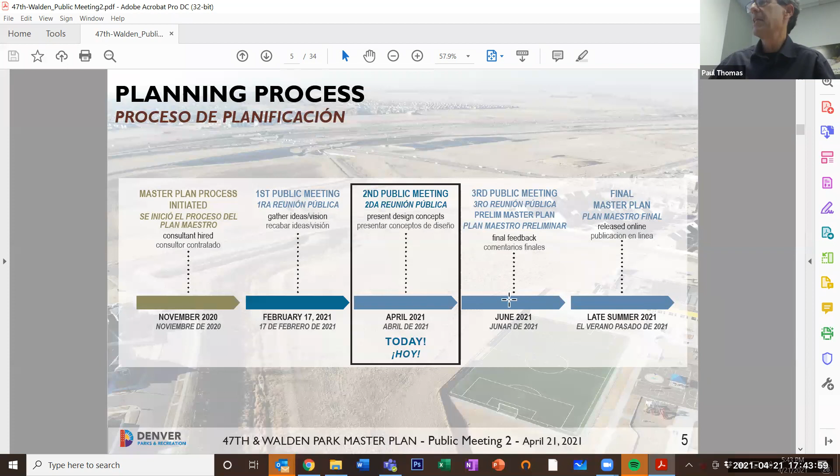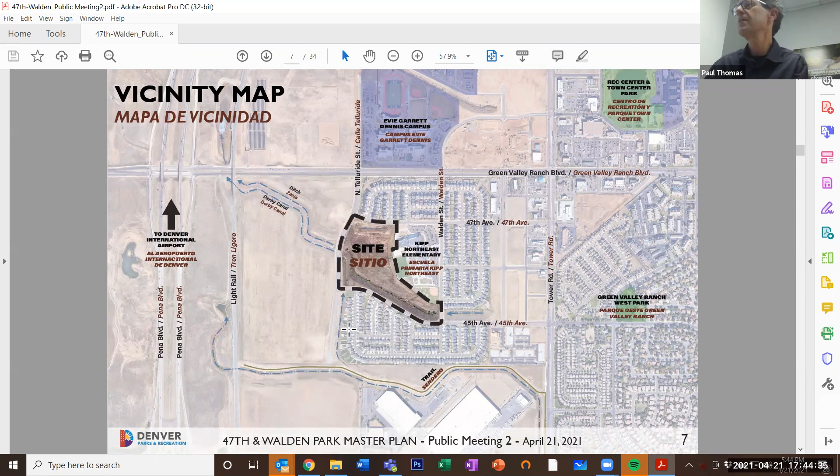So going first to the recap of the first meeting, and I'm going to go through these fairly quickly. The site is in the Gateway area near Green Valley Ranch. You can see the site here in the middle. It's in a neighborhood of existing houses, but it's also bordered by a lot of future development parcels, as you can see from this aerial. It has a historic ditch that crosses the southwest corner, and it also has a drainage way going through the middle of it.

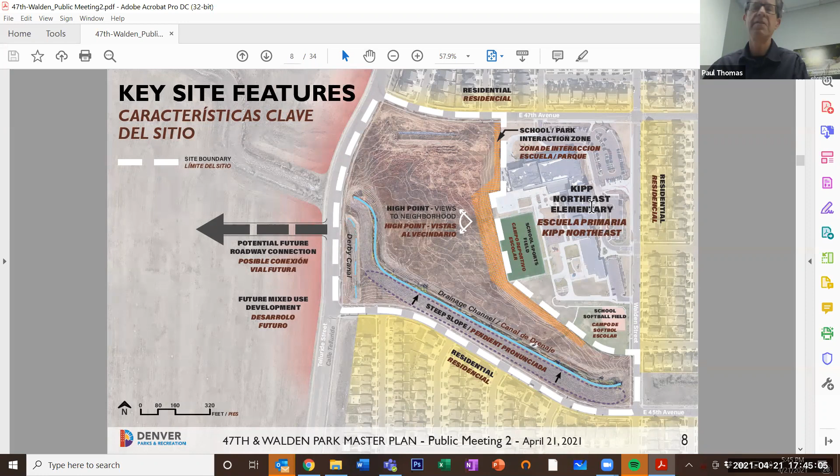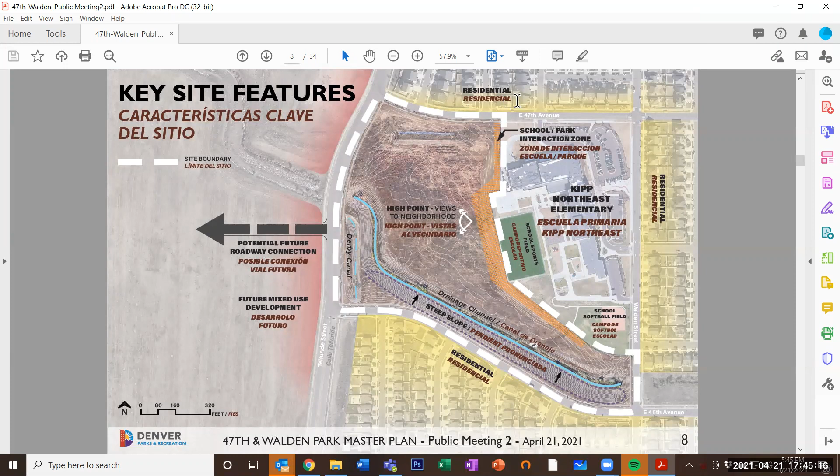This is a slide that shows some of the key features. The blue line there is the drainage way, and then this little also blue line on the corner is the old Derby Canal, which was part of the Highline Canal network that delivered water to the Rocky Mountain Arsenal area. You'll also see that we share this block with the KIPP Northeast School, which is both an elementary school and a middle school. And then you can see the neighborhoods to the north and to the south.

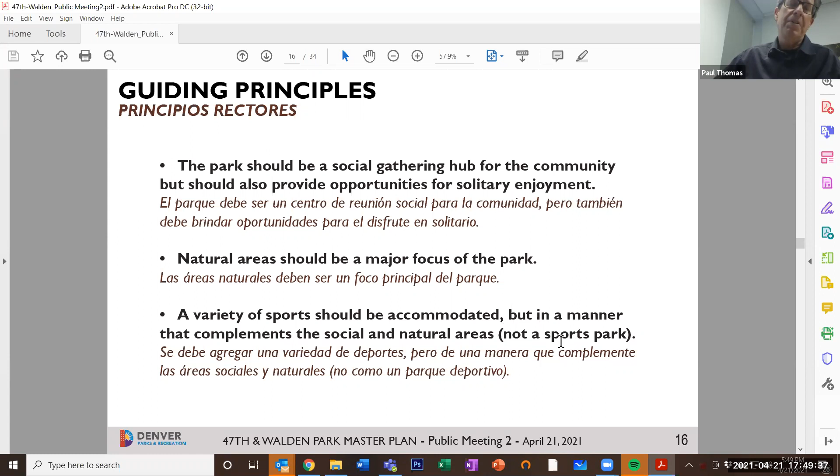We should connect the park to the community on all sides and create strong pedestrian connections to adjacent neighborhoods. The park should have a strong connection to the Derby Lateral Trail, a regional trail planned along that corridor, as shown in the initial slide. There's good reason for this connection, as it will link within and between neighborhoods in the local area.

The park should provide opportunities for joint use by the KIPP school for students and teachers both. We thought the drainage channel should be enhanced as a natural feature and environmental learning opportunity. The park should be sustainable and designed to conserve natural resources, and should be a safe place in all meanings of that statement.

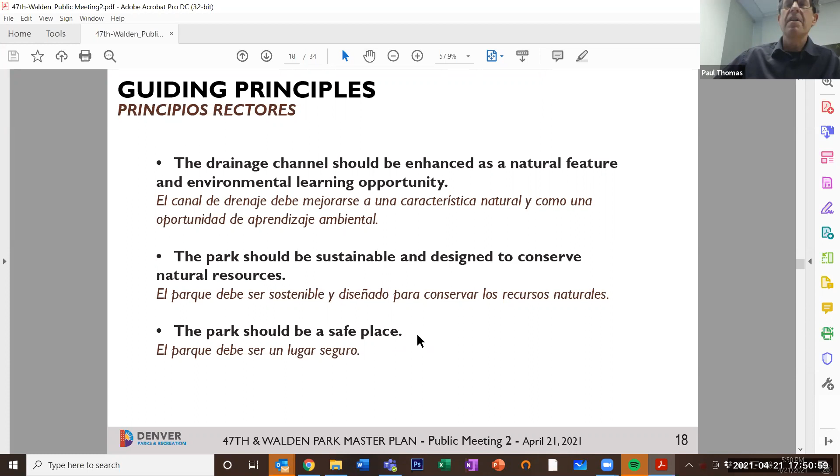The park should attract and provide recreational opportunities for all ages and cultures. The activities should complement the recreational offerings already in the far northeast area and nearby parks. The park should be flexible, able to accommodate a wide variety of functions and events such as concerts, picnics, and celebrations. It should encourage healthy living and feature a variety of landscape types, from manicured grass and natural areas to gardens, shrub beds, and tree groves. That wraps up the guiding principles.

And we're going to move into the concept plans. I'm going to turn over the presentation to my colleague.

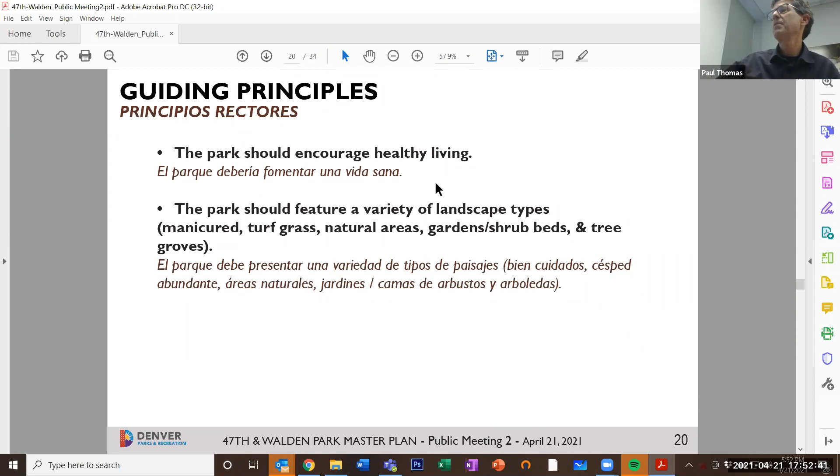Actually, before that, can you go back to the guiding principles? I wanted to make sure if anybody saw something that stood out to them, resonated with them, or if they feel something is missing—please put that in the chat. We haven't started using the chat yet, but we want to hear from you. If there was something you heard that you loved, let us know, tell us what you like especially, we love encouragement. So, are we going to move to a different file?

Yes, let me share my screen. Is everyone seeing my screen? I'm not seeing it yet. We just see your desktop, you might be sharing the wrong thing. Try that again. I stopped sharing, are we good now? Yes, thumbs up, great.

Great, thank you all for coming, and thank you, Paul, for the synopsis of our last meeting and the general overview of the project. We're really excited to be working on this park plan, a 13-acre park in this growing neighborhood.

Have it on full screen, Laura. I'm not able to turn the— oh, there it goes. Okay, just takes a moment, I guess.

So we've developed 3 concepts to share with you today. What emerged from our first public meeting were some themes: a lot of interest in a sports theme, one that's a bit more passive recreation focused on nature and open space, and a third focused on activity and a social community hub. We've prepared these 3 concepts focused on these themes. However, it's really important to keep an open mind.

Wherever the design lands will, no matter what, probably be a combination of these themes. This is just a way for us to organize and present it to you with these key focus areas. But when we send out the survey and solicit your feedback, even in this forum in the chat, we really want your feedback on specific amenities and design features that you really like, or that you think are missing, or you don't like in a particular location. That's the specific feedback we're shooting for.

So we welcome your feedback, and we'll get to that in a little bit. For right now, I'll just run through these. Feel free to write your questions in the chat, and we can open it up at the end. So this first one is the sports concept.

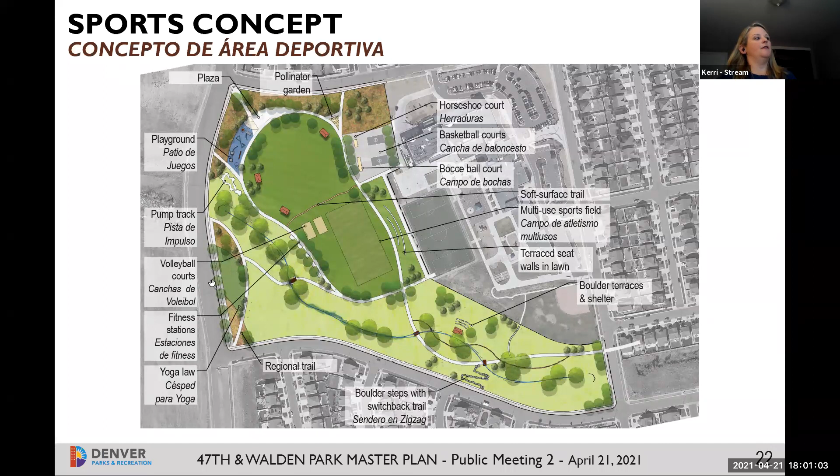So that is the sports scheme. I just wanted to expand upon it with some imagery. Sand volleyball and turf are over here, and we have soccer shown - soccer is a very high demand sport, and this field would support that use. We're showing some boulder terraces for how that might work into the hillside, since there's grade change as the site moves from east to west, with the grade going down toward the drainage area. We could take advantage of that grade with terrace seating, and the bottom image reflects more formal stadium-like seating in this area.

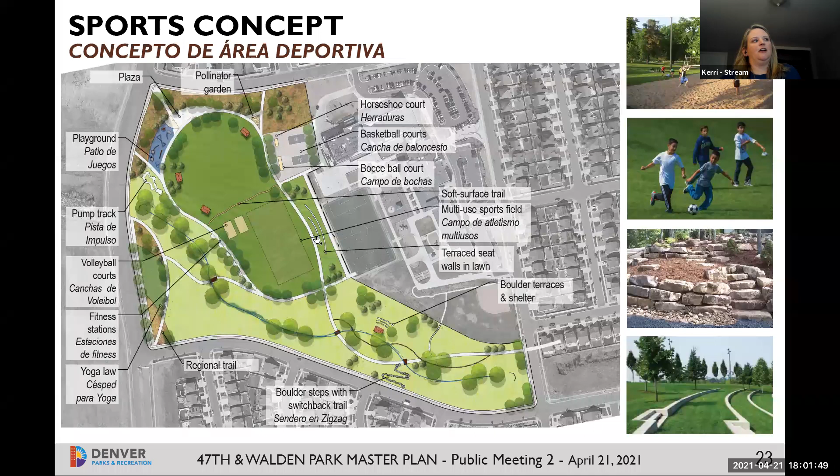And then a couple blow-ups here - we wanted to zoom in because people might be viewing on their phones, so screens are small. This central northwest corner I talked about would have play, yet to be designed in detail, but with a colorful character and lots of different play elements, slides, always important. There might be a way to integrate trees into the plaza space and do some seat walls and informal seating as a gathering area.

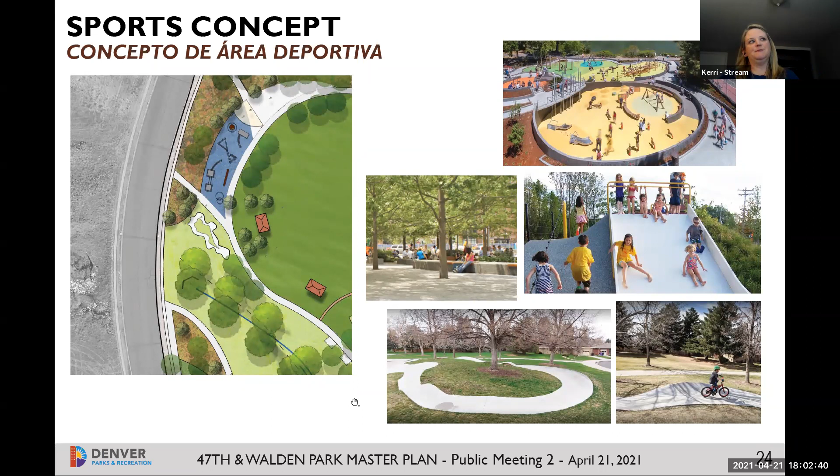These bottom two images show a local park that has a pump track circuit similar to what we're proposing in this plan. And lastly, a zoom in on the court area showing horseshoes, bocce, and basketball - which was a notable use people really wanted, especially as more youth responded to the survey. So we definitely wanted to make that a key element in this scheme.

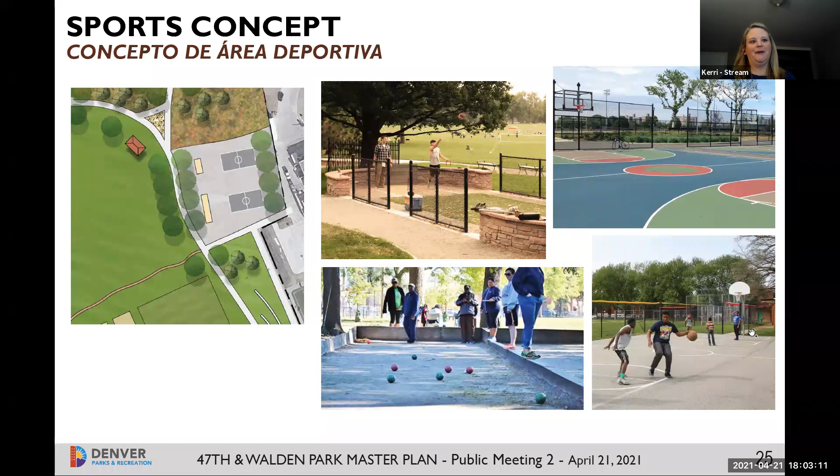So I'm going to keep going and then we'll talk about it all - does that sound good? Okay.

So this is the nature concept, focused on passive recreation and really exploring nature. We have native vegetation areas along the top and a shrub bed to break it up. As you can see, there's much less turf in this scheme - the planting would emphasize natural grasses appropriate for our climate. On the northeast side, there would be an overlook plaza at this high point, which could look out across the park and to the west.

This scheme focuses a lot of the energy and development - the active part of the site is adjacent to the school in this zone. We'll show you a blow up of that in a minute.

One thing about this scheme, unlike the last one, is it has an interactive water feature. We know that ranked super high on the survey, so we wanted to look at a couple different ways to do that. Here, the water feature is like a meandering little stream - not a ton of water, not a lot of jets and action, but focused on exploration, with little kids getting in there and exploring the meandering river. What's great is it meanders down and connects with the drainage channel, so it works very well with this site.

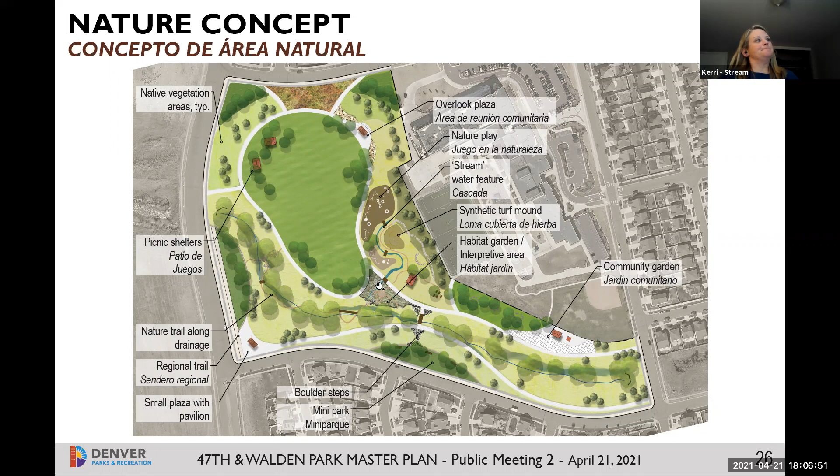And anything I missed on this one, Paul? I can go to the next one. I think you got it.

Kerri, that is one thing maybe that you could talk about, the nature trail that connects to the play area and goes along the drainage. Along here, yes, thank you.

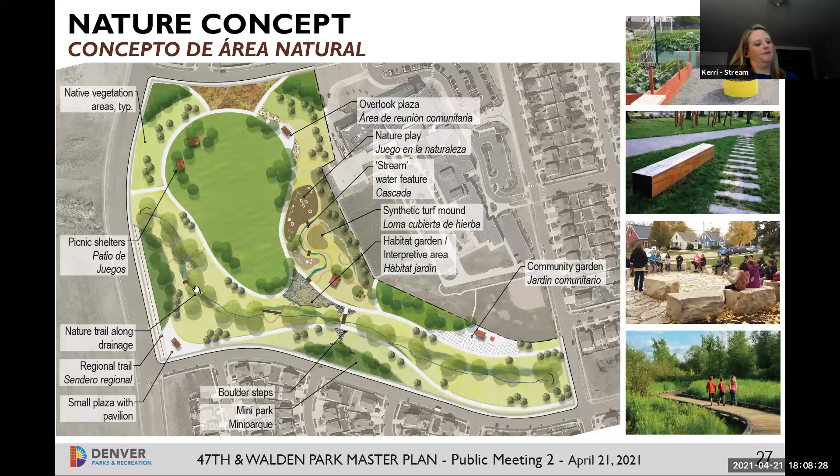Right, so there's this discovery path. Let me see if I can zoom in a little bit. So it's more like a thinner, informal path. This is a discovery path that runs along the drainage area and would have little boulder crossings.

This drainage channel does not have a ton of water in it. It's quite flat, but there is enough in there where this could be a great spot for there to be a discovery trail. We are also proposing

a cottonwood grove or cottonwood planting in that wettest, lowest part of the site, which would be a great amenity to provide shade. There's not a lot of shade on the site right now, so we definitely want to take advantage of the drainage area to get some cottonwood trees in there. So that's what you're seeing along here.

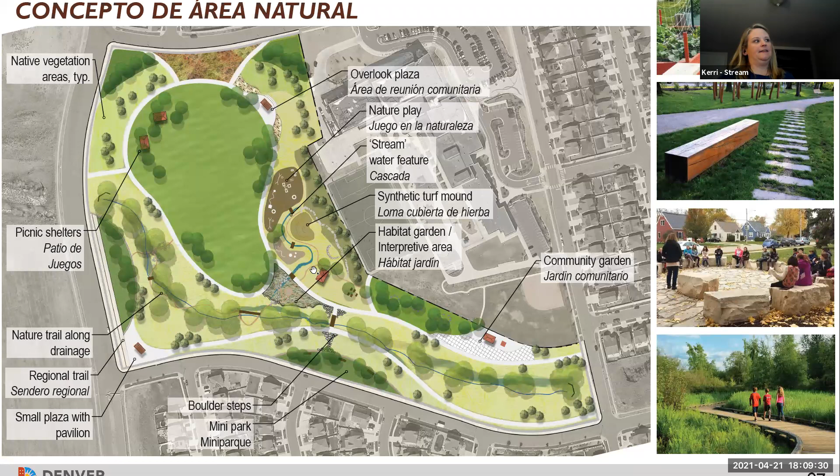And then that discovery trail links up with this kind of key feature of the site. So here we are, zoomed in. This is the KIPP school and then their field. We're directly adjacent to that, but we're using some evergreens along the edge to be a little bit of a buffer.

In this scheme, we have play in all schemes, but in this scheme, we really wanted to highlight nature play. And so that's what is seen in this area right here. It kind of crosses over a little bit, and you've got maybe a little kid zone.

This blue squiggle is the meandering interactive water feature that might look something like this, boulder lined and safe for kids to go in. And also along with that same scheme would be a dry creek bed that, as the water feature ends and it gets towards the drainage area, becomes a dry creek bed, which is also fun to explore.

The water feature itself could have maybe some larger areas where there are large boulders so that the older kids can get up on those.

We would want to, if we go ahead with this scheme, do some studies of scale and how that would work, so that the water feature isn't a large feature, but that it meanders through the rocks in certain ways. This image shows how there might be boulder crossings that occur down by the drainage area. And then on the bottom here, these two images just generally reflect what we think of when we say nature play, natural materials and exploration, and that lends itself very well to this scheme.

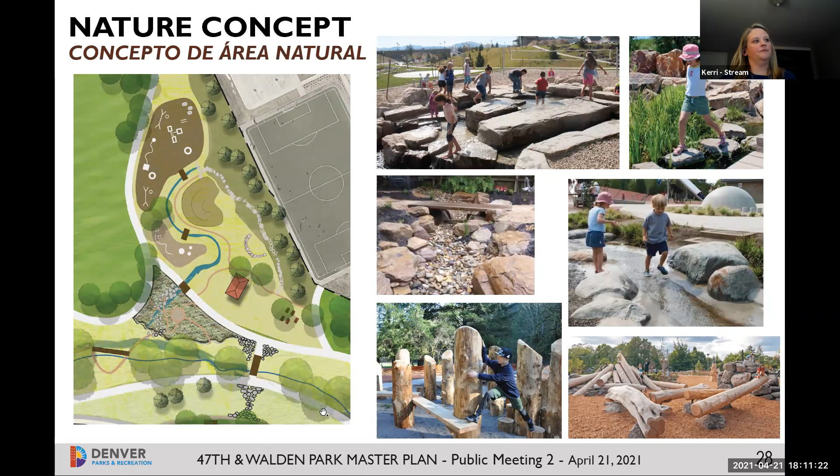So lastly, we have the community hub concept. This just really takes the idea that this park is a vital part of our neighborhood and that it should have a really active core.

So in this one, we were looking at, okay, what if we really centralize the activity and put it on the north side of the site? So that's what you're seeing here. We can dive into that a little bit.

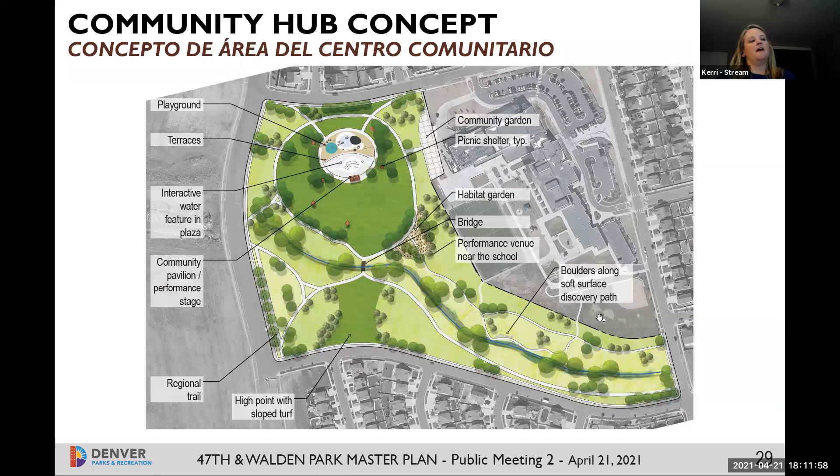In general, we're cognizant of access and circulation. We wanted to make sure that all the neighborhoods from all sides have equal access to the park. I'm going to go to the next one.

Along the native area and natural grasses, we have some stone terracing and stone boulder access to the drainage area. Again, this path along here would probably be soft surface, and we'd keep the main circulation along this edge right here.

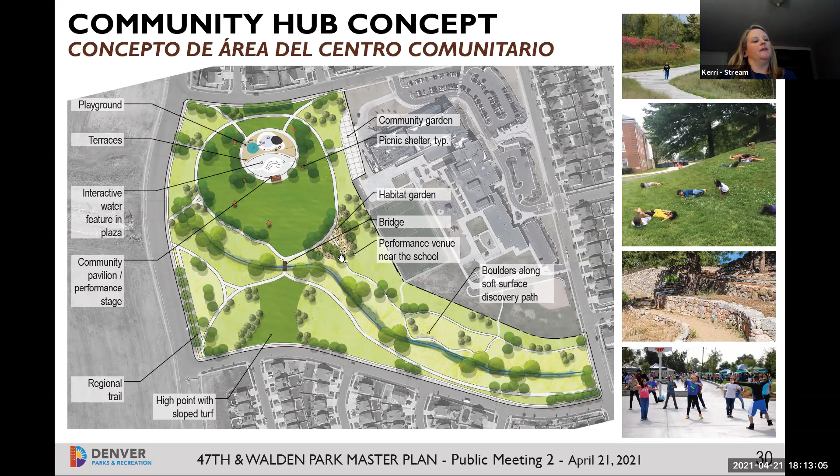So I'll just go to the next one to show really what's going on here. So we have the main central hub, and as you enter the park, this kind of round shape would be divided into a really active play space on the top of it, and then there would be a little bit of terracing, and down on the bottom would be a large plaza that would be almost like a plaza-like interactive water feature.

This would, contrary to the last one that was more natural with a slow flow of water through rocks, be much more jets and active use. The paving would be very important in this space to make sure there's interest outside of the summer months.

It could be something like a labyrinth. We could also look into incorporating public art into this plaza, either as part of the water feature or not. Public art rated highly on our survey as well.

So this would be a large space. It could be broken up with some flexible seating and really serve as the hub of the neighborhood.

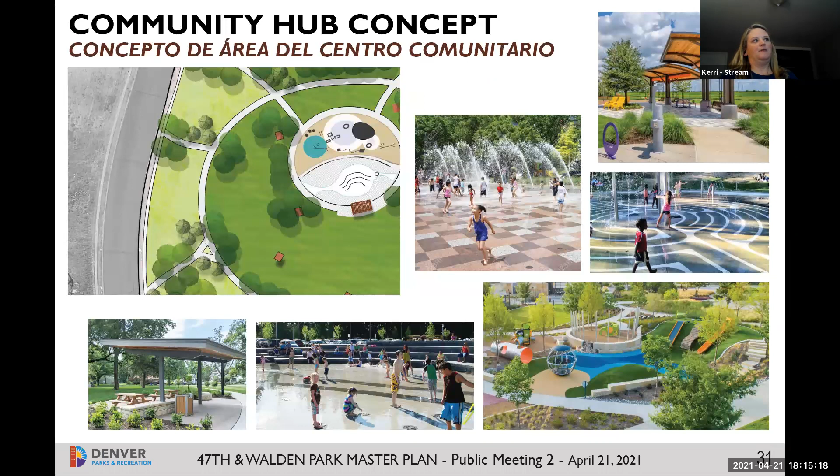And then we can look at all three and open it up to questions and comments. We have all three on here. I know they're very small, but just wanted you to be able to see them all. I know that's a lot of information to take in, but you can do a quick comparison as you look at all three, and I can go back to any of the slides as needed. And Kerri, just as a reminder, the first one was the sports focus.

Yes, the second one: sports, nature, and then community hub. We've already had a few comments and one question. I did receive a comment about a preference to have the playground away from the street, so that second concept was preferred.

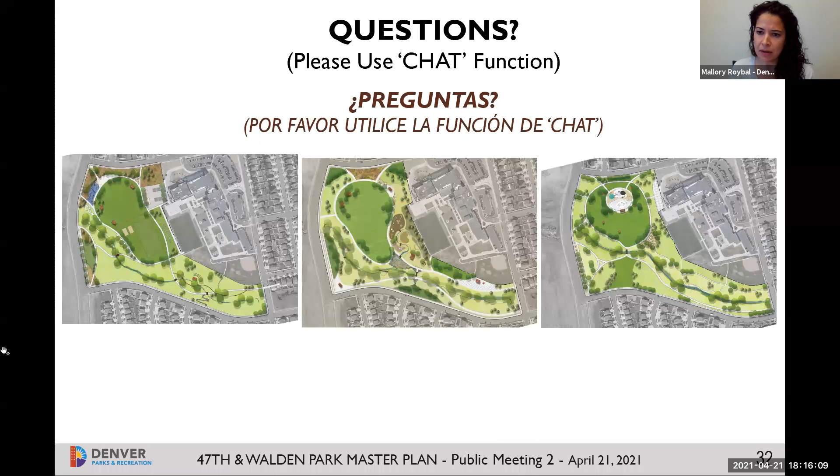We also have a question about the boundary between the school and each of the concepts. Could you talk a little bit about what that boundary looks like between the school property and the new park? Kerri, I could jump in on this. Yeah, that would be great. Thanks.

So if we start from the boundary on the north side, between the park and the school, that's largely a service drive for the school on the school side. There's about a 4-foot tall chain link fence that runs along that, fairly continuous, adjacent to the school's sports field. Once it gets to the south corner of the sports field, it angles across. So we have the fence, it's not a super tall fence, about 4 feet tall, and that edge is for the most part pretty favorable—maybe not so much on the north part where it's the service drive. So the northern part might warrant more of a buffer or some kind of transitional use between the school and the park.

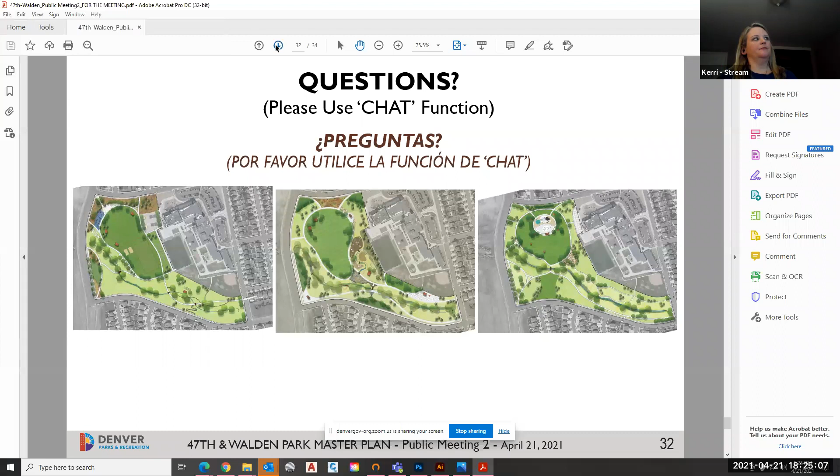Great, so just wanted to revisit the process, the public process, and where we're at. This is a master plan — as Paul said, this isn't construction documents. The master plan was initiated last year, and we've had our first meeting, and now our second. Our third one, we're targeting June.

And in that meeting, we will be showing and sharing with you a refined concept that takes in all of the survey data that's going to go out, and work on the design to push forward all the things that the community wants and what makes sense for the Parks Department, our budget, and all the factors. We will refine a concept plan and present it to you.

And within that, we will want some feedback. That feedback might be on more detailed information — specific playground features and whatnot. It'll be more drilled down in terms of the feedback we'll be wanting at that time.